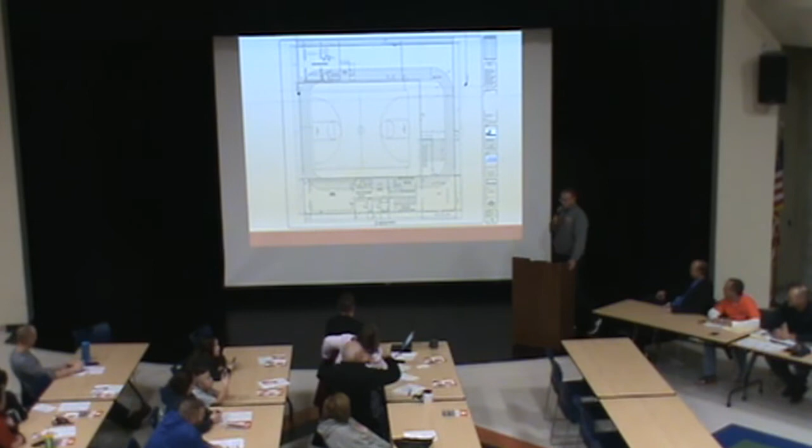If you want to click to the next - the outdoor restrooms and locker facilities are in the plan. This is nothing final, and I think it's all in your drawings that you have at your table, but it kind of gives you an overview of wishes that we would like to see take place.

And I do want to stress that that big room, it looks like a basketball court, but it will not be a basketball gym floor. It'll be a multi-purpose type floor to where it can handle all the different sports. I shudder right now that baseball and softball are using our gym because they want to be able to pitch live balls on that gym floor while it marks it up.

So we let them, but it's not a good thing. Here in this room, it would be totally acceptable and a lot easier for them to work out and practice. So I didn't want you to be fooled by the way the markings are that it's a basketball court. Clear around up top here, these stripes are the elevated running track. And then at the bottom are the locker room facilities for all the outdoor sports that would be able to utilize those.

Right now, everything that happens outside - every sport that practices, every football game, every evening activity that we have - they have to come inside and use the locker rooms inside, including the visiting team. The visiting team comes in and uses the same locker room that our girls basketball team uses for a basketball game. So this would be a huge addition to be able to offer to our kids.

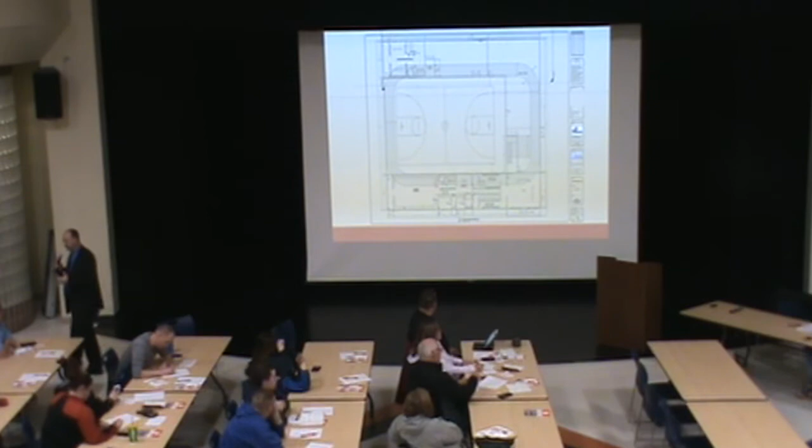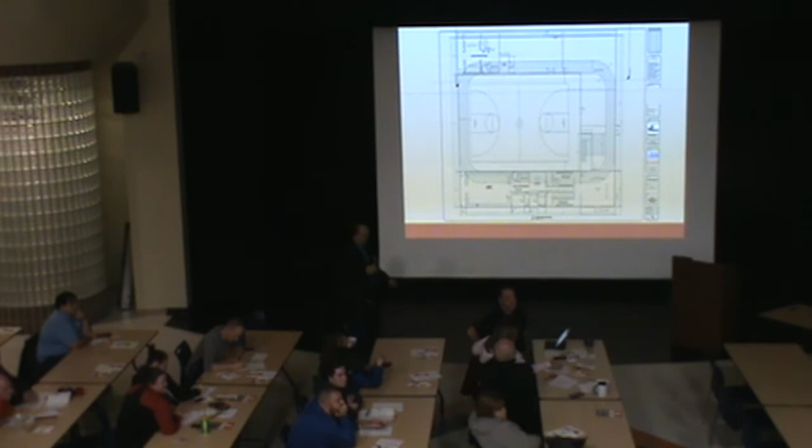You didn't talk about where it's going to go. I've heard the baseball field is going to move, so can you guys talk about that? Yeah, that is the intended plan right now.

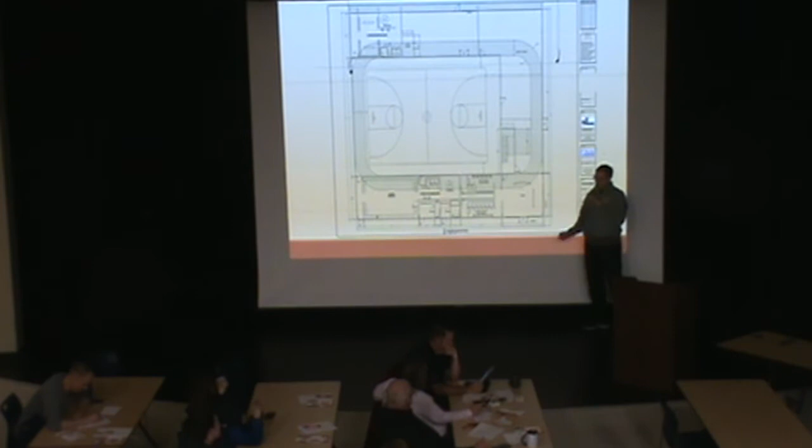This building would sit basically right here, where home plate of the baseball field is, so we would have a new entrance. The dream is to have this be a new entrance into the stadium, the football and soccer stadium, track right over here. So you wouldn't walk through the current ticket booth area that we have right now. You would walk past this building and then gain entry into the stadium area, kind of where the home dugout is right now for the baseball field. So that's the plan.

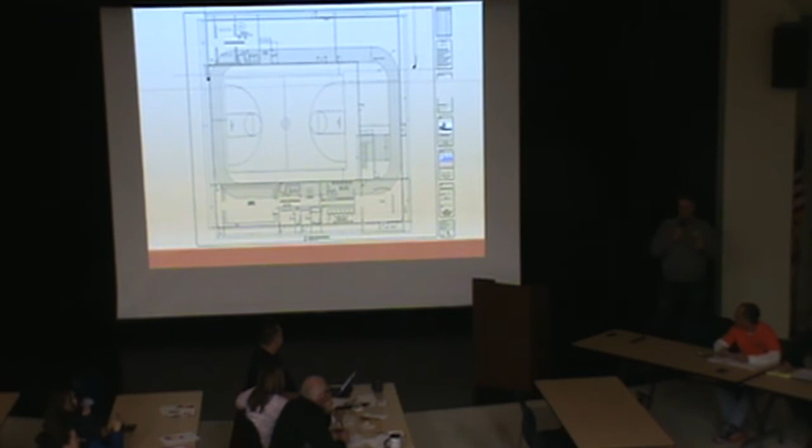I guess the elephant in the room is the baseball field, and the reason—I mean, it's a totally separate issue, but it's a huge safety issue, the location that it sits right now. Because foul balls being hit over into the track meets or track practice, anything that's going on in the stadium, people are getting hit all the time with foul balls, whenever we have baseball games going on during those events. So if you're interested in why the baseball field needs to be moved, that's the answer to that question.

I can add just a little bit to that. We did a site facility master plan this year with the board, and basically had a company come in and look at our site and say, hey, what can we do to improve some of the safety aspects, some of the traffic flow aspects, some of the full accessibility to different fields, and how can we arrange things that would work a little better. Out of that study came basically what we kind of already knew, but they definitely supported it, was that the baseball field is kind of in a bad location. Because of where it is, it kind of landlocks the rest of the property behind it, so it makes it hard to utilize your soccer field back there and get parking where you could actually use some of those fields a little bit easier.

So the thought right now, and one thing we're looking at, and probably going to go out to bid here this spring on, is the baseball field. It is a separate issue, however. Shane would tell you—I'll say it for him since I got the mic—they're looking to build this building whether the baseball field would move or not. So the ideal situation, and what Jake explained to you, is kind of what the site plan looks like as far as where would be the best place, centrally located on the property, so that softball fields can access it, baseball fields can still access it, your soccer fields could access it, so that as you develop the facility, there would be a better way to utilize it and have more access. So that's the whole idea behind the baseball field from a safety standpoint, but then also from a future development of your grounds standpoint. And how the board has come up with that portion of this so far.

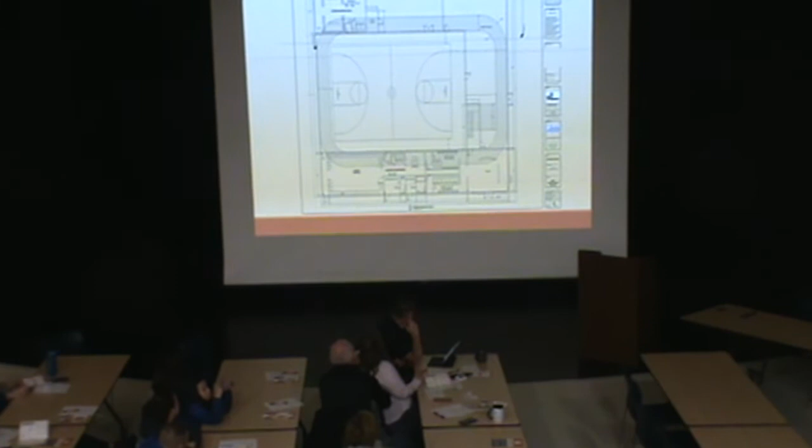David, can you point out where that is? It's at the bottom, in between the restrooms and the locker room. There are two square rooms down here. Yeah, this says coach's office and this says referee's office. I'm not giving the referees their own office, so that would be the trainer's room. It would have plumbing and all that because it's right next to the restrooms.

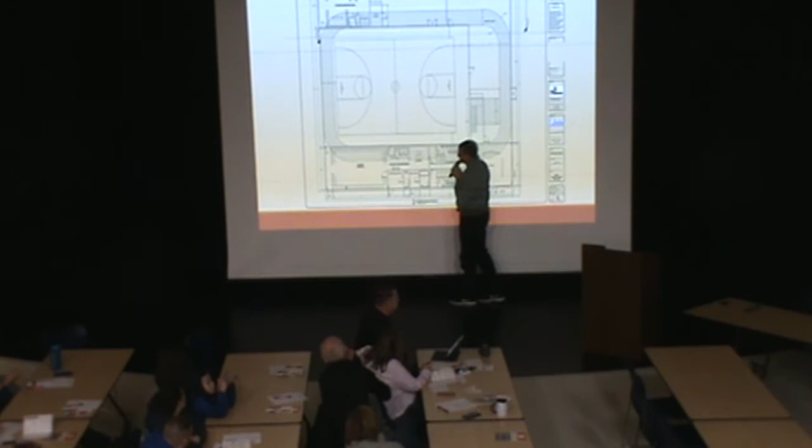My name is Rob Loudon, and I have a question as far as size. To me, it looks like there are no baseball cages. Is there room for baseball cages for the baseball and softball teams? And if not, would it be better to go a little bit bigger, so that 5 to 10 years down the road we're not looking back and saying we needed more space? Can we expand off of it? I see the basketball court, but I still see issues with nothing going for baseball or softball.

To answer part of the question, we have planned to have drop-down baseball nets for batting cages. Those would drop down out of the ceiling, stored in the rafters. You'll see those a lot in gyms these days, so they would drop down out of the ceiling.

Was there more you asked? Is it going to be big enough? It can be expanded, yes. There's a square footage requirement that put us over the limit requiring a sprinkler, a fire suppression system. Construction's really not my forte. So we are at that maximum square footage right now. You want to say something?

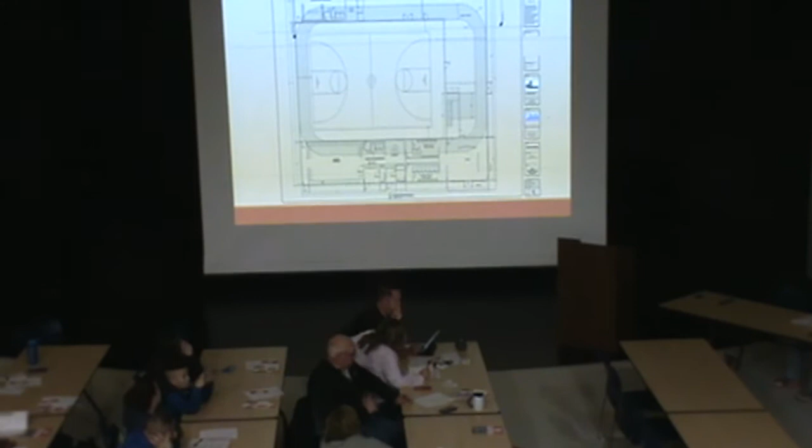Can somebody go up there and point out what each of these rooms are? I cannot read this little thing in the brochure, I can't read the wording. Yeah, I got new glasses and it still doesn't help. This is for you, Faith.

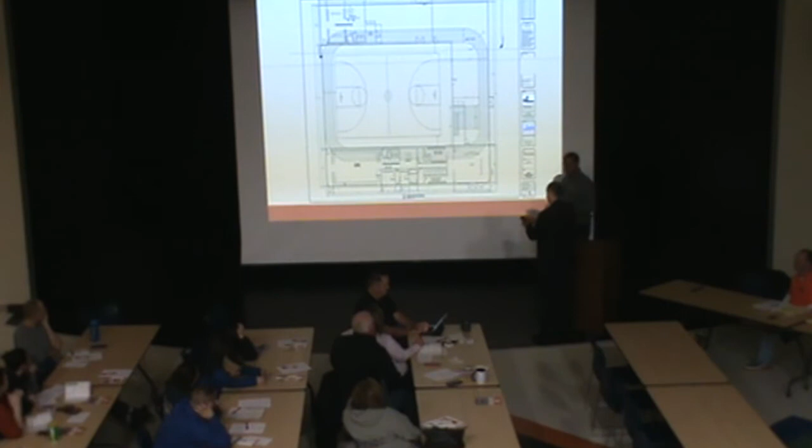Okay, so right down here in the lower left is a locker room, and that is the home locker room. It's closest to the stadium, so that would be used for basically our boys' sports, football and soccer. Those would be the two main ones that use that.

So then for an away football game, the visiting locker room is up here, and it's much smaller. It's got showers, bathroom stalls in it. I'll come back down here next to the boys' locker room. This is the restroom for the locker room and a bigger shower stall.

Again, we have a coach's office. Next to that is labeled referee office, but that's where I think the training room would be. This is all divided, so it's accessible from this side and the outside. So if you, as the public, come into the building, you enter here through this foyer. This right down here is where the current concession stand is, so you'd walk past this to get into anything going on at the stadium outside. You walk into the foyer, and here's the public restrooms right here.

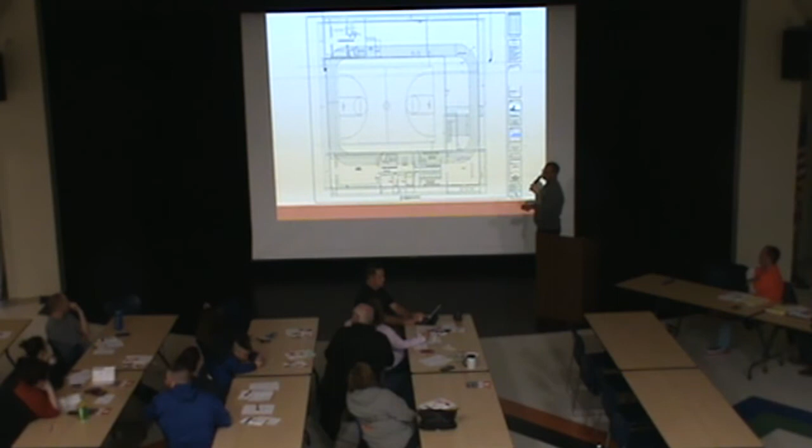You guys think I'm missing anything? The whole upper area, other than the visitor locker room, is storage. This is the locker room, the weight room goes from here to there, and then this is storage right there. Are there any concessions incorporated in this building, or will it remain separate? It'll remain separate.

Yeah, the steps right here take you up to the track, and the track is a balcony effect that goes over the multi-purpose room. It's kind of cool the way it's drawn up, it goes over the weight room as well. So there'd be a doorway access that you'd run through from room to room as you're running. Any other questions on that?

Ben Griffin. I have a couple questions.

Will the weight room take place where the weight room is now? Will that weight room be gone upstairs? Yes, the plan is all those weights would go outside, and I bet your next question is where the wrestling is going to be. So wrestling would gain access back to the way it used to be. They'll have the whole mezzanine here in the gym. You'd be able to have that all for wrestling then.

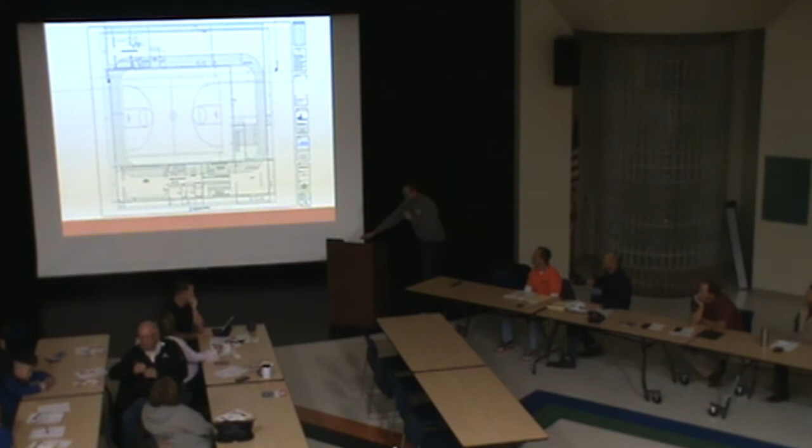Couple of questions. Is there a women's locker room? And a women's coach's office that we don't have to share with men? This is the women's locker room here, labeled as such. But no, there is not a women's coach's office. We'll get you an office. This is not labeled men's coach's office, this is just labeled coach's office.

Is there a bathroom in the coach's office? Yes, right there.

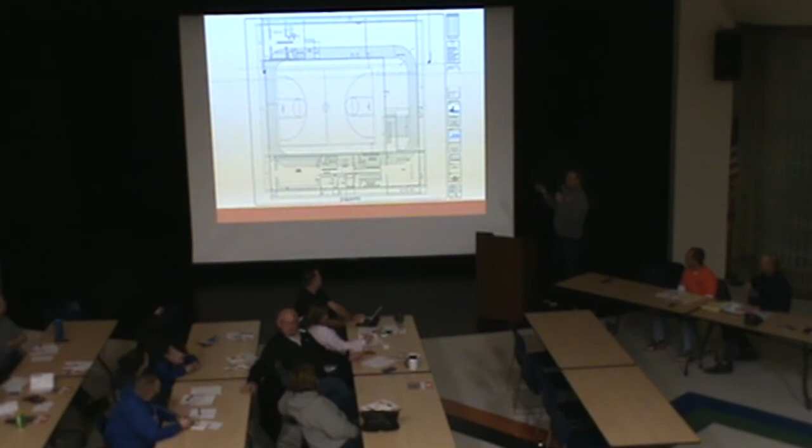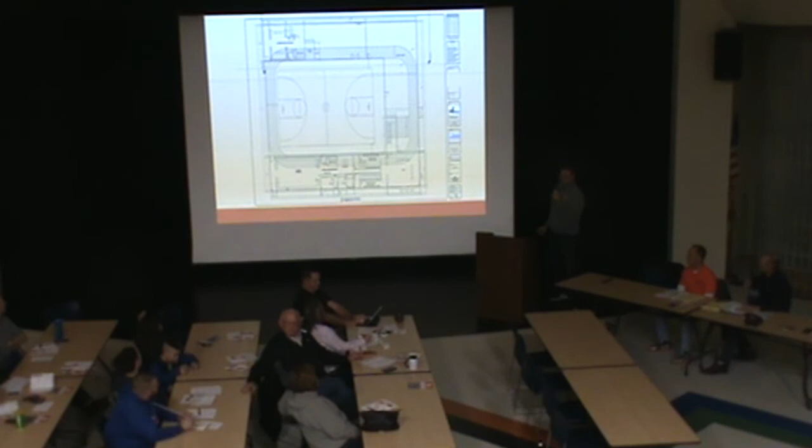Another question a lot of people ask me is what's the distance of the track and how wide it is. I'm not sure exactly, but part of it is, the bigger the building, the bigger we can make the track, and the smaller the building, the smaller the track's going to be. So the more money we raise, the bigger the track can be. Currently it's about 50 to 60 feet this way and about 100 feet, so you've got about 320 feet of track, and it's about 3 lanes wide.

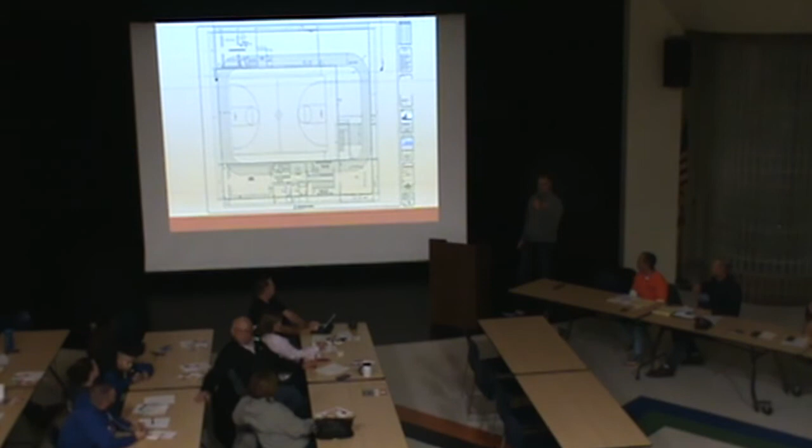And if we raise enough money, we will make a women's restroom and coach's office. I can't reiterate enough, this is just like a dream, it's just initial drawings. Nothing has been approved, stamped, or anything like that.

If the baseball and softball fields are going to be on the other side, could there be public restrooms on that side for the fans? No, it's not on there, but just curious. Part of the site plan the board had done, correct me if I'm wrong, but included in that long-term plan, in between the home plates of the baseball and softball diamonds, was a concession area slash announcing booth that also had restrooms in it. So the ideal place to put the baseball field, the home plates butt up against each other, and that would be in the middle of that.

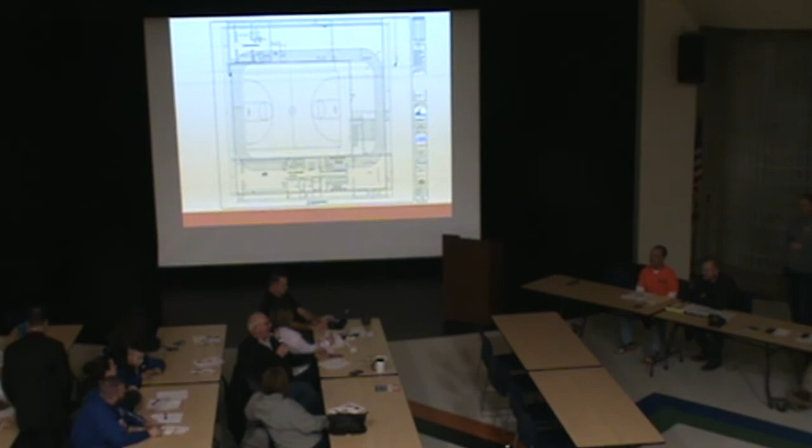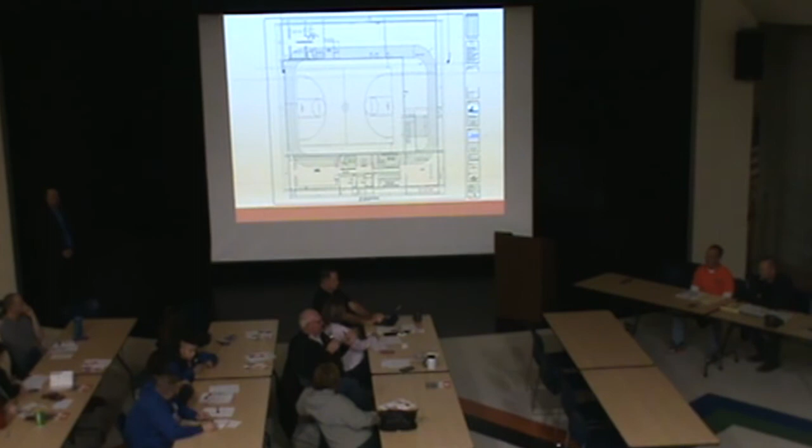Early on, I heard some possibilities of, in order to expedite this and get some use out of it early, possibly doing this in phases. Is that still a discussion? Yes, that's been discussed for sure. We talked about just getting the shell up and making the outdoor restrooms, having a big wide open room with a gravel floor if we have to for the time being. That's something we've talked to the contractors about, and they said it's definitely feasible to do it that way if we wanted to.

That question's come up like 3 times tonight, and I think it has a lot to do with how much money we think we're going to raise. Because we're not going to build this big monstrosity and not be able to raise enough money to finish it. So if we build this building and know we've got the funds coming in to finish it how we want to, that's our plan. But if we have to downsize the building, it'll basically be because of the funds.

We've also talked about inside the honor room having a donor recognition wall. So I'd just say, we're talking a lot about the size and what we might be able to do with it. I don't know how many people are in here, 100 people, but the fundraising piece of it, we need your guys' support, we need everybody's support. If everybody here could go out and raise $1,000, that's a lot of money. So I did want to mention we anticipate having a donor recognition wall, and we're open to other fundraising ideas.